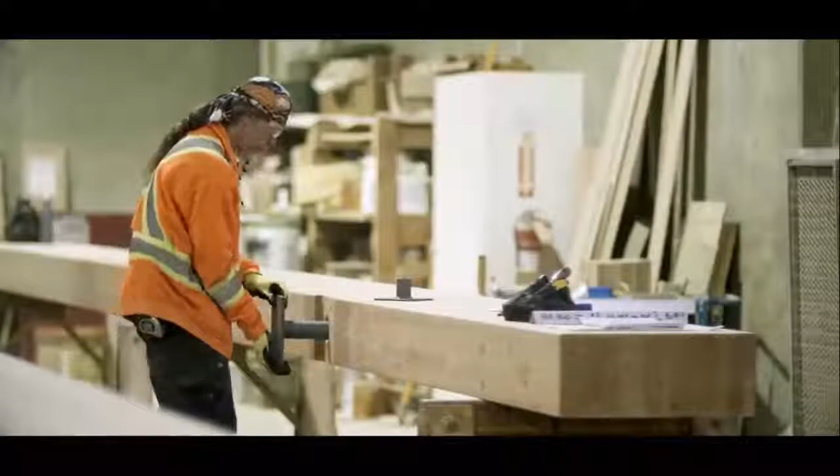They've always been there for us, offering comfort, shelter, even oxygen. Just as we think we've outgrown their reach, we discover a new potential that goes far beyond the treetops. Mass timber construction represents a revolutionary way to grow together, a method of deconstructing what nature provides and reassembling it to be stronger, opening up new possibilities in construction that are sustainable and cost-effective.

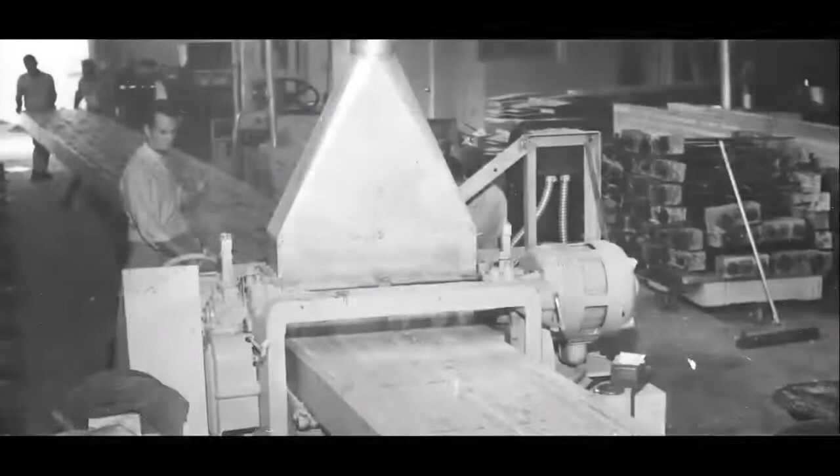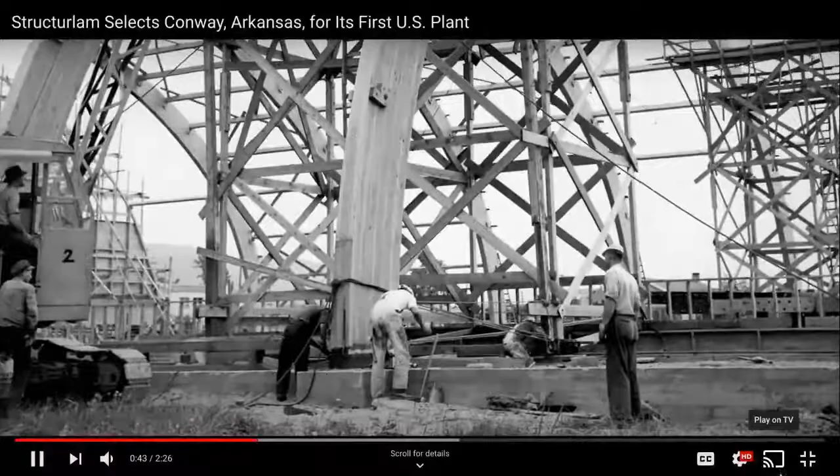For nearly 60 years, Structurlam Mass Timber has been at the forefront of the mass timber revolution. It took root in British Columbia, where we realized early on that the future is not a place we are going, but one we are creating. And we made it our goal to bring about a dramatic transformation in building construction by combining our passion for wood science with timber engineering expertise.

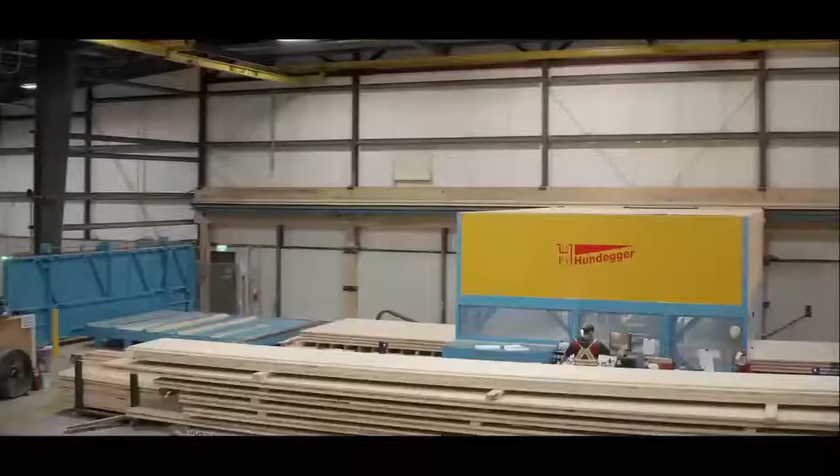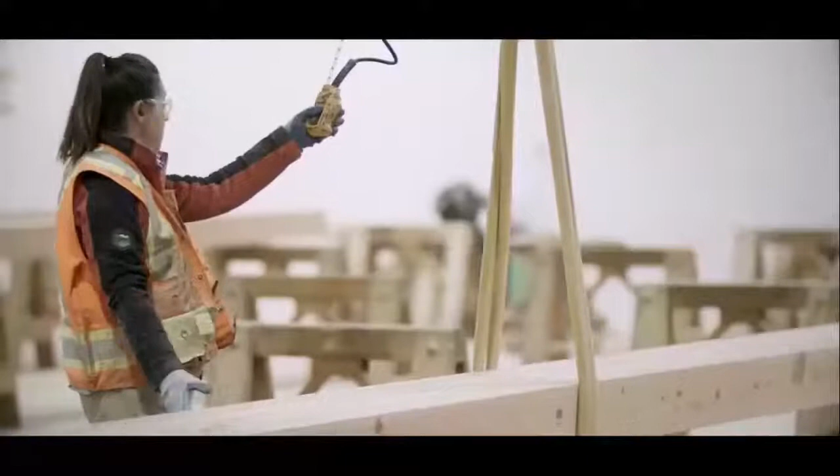Today, our facilities use 3D modeling and sophisticated CNC fabrication equipment to create structural components like our CrossLam CLT panels and GlulamPLUS beams and columns. These products are shaping the future of design and construction, helping to change minds as well as building codes, resulting in tall wood construction up to 12 stories in Canada and 18 stories in the US.

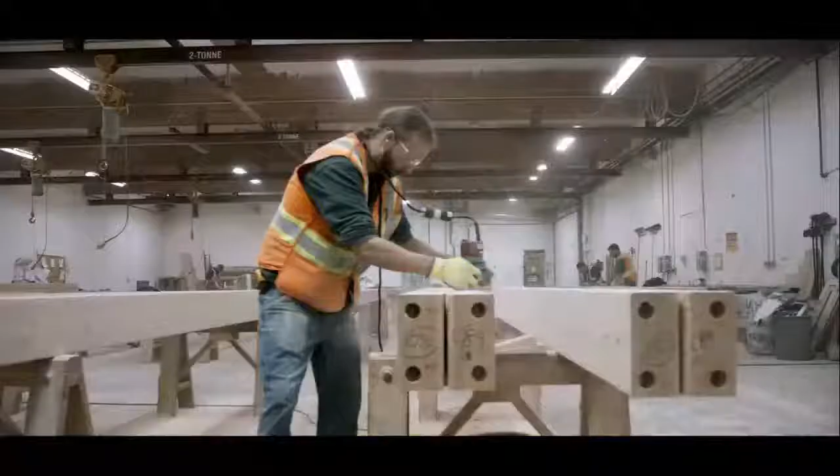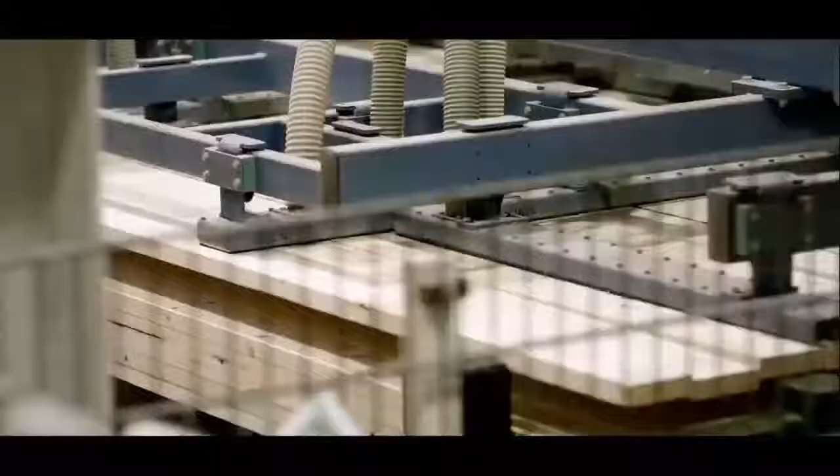Mass timber is appealing to eco-forward building owners and developers for reasons beyond sustainability. It's a proven system that builds without compromise on quality, structural design, or aesthetics, all at competitive costs. Mass timber buildings are roughly 25% faster to construct than concrete, require 90% less construction material delivery traffic, and 75% fewer workers on site.

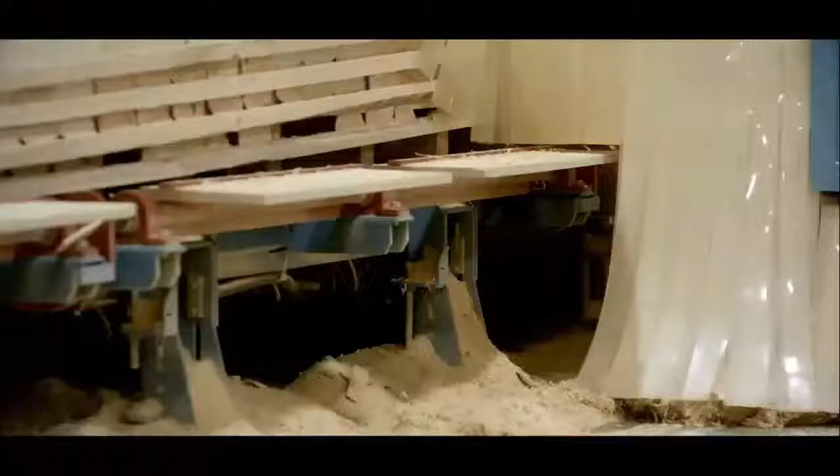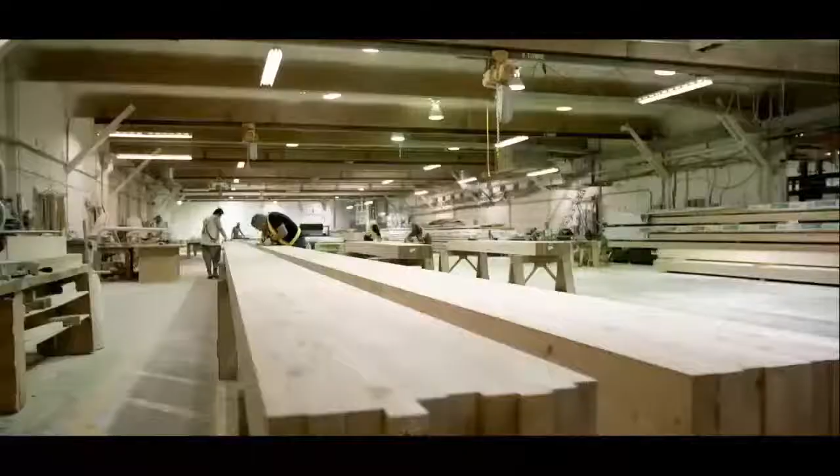Complementing our plant in British Columbia, our new plant in Conway will make mass timber more available across North America, with a combined capacity sufficient to construct 3 200,000 square foot office buildings every month. Engineered and proven, with the power to lock away carbon through the lifespan of the building, mass timber is quickly becoming the platform of choice for architects and builders.

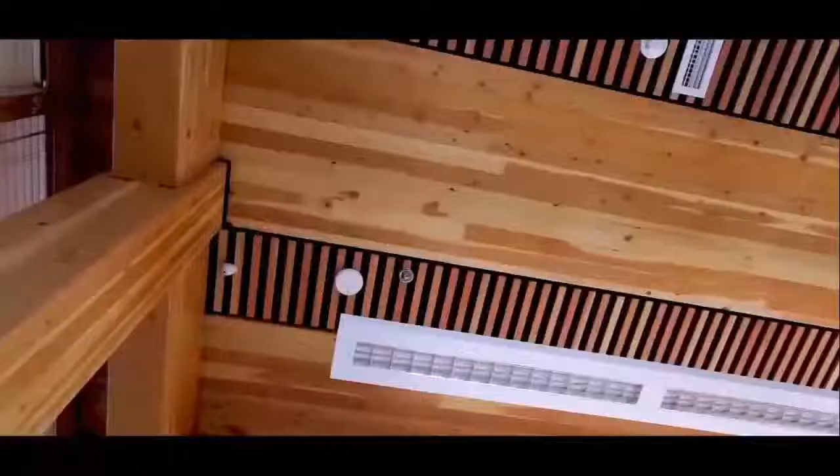At Structurlam, the beauty of our products will take your breath away. Their sustainability will give it back.

All right. I mean, beautiful video, right? Yeah. Thanks for showing that for us. That is a real nice piece of work.

Yeah, for sure. Well, I'm looking forward to talking more about this plant that you have coming up in Arkansas. I know we're going to hit on that kind of near the end of the show with the whole Walmart conversation. So let's give us the overview.

Why right now is this mass timber revolution happening here in North America? Yeah, I really believe it is a revolution. There's some real fundamentals I'll speak to, and then maybe we can go over to some of the other information I shared with you, Dave. But it starts with the fact that North America really has a fantastic building with wood culture.

If you look at the statistics of the consumption of wood per capita in construction, North America by far and away leads the usage of wood in the space of wood in construction.

Secondly, we have a lumber industry where we draw our raw materials from. So Structurlam, we do not make lumber. We buy lumber on the commodity market, and at that point we incorporated it into the manufacture of our mass timber products, which are glulam beams and columns and cross-laminated timber panels.

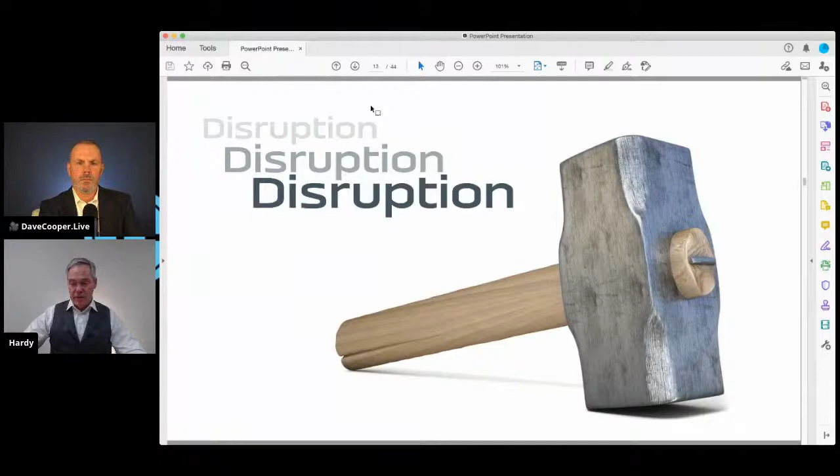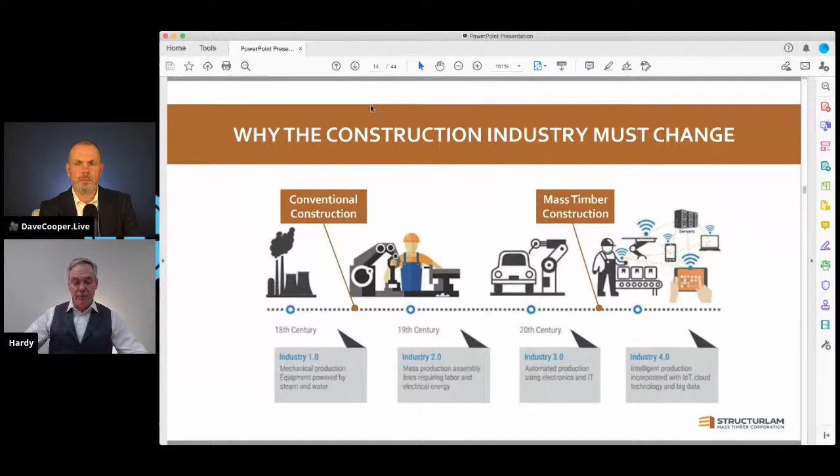Here's some fact, Dave, why we need to have this disruption.

Any off-site construction or prefab trade show you go to today, I'll give a little plug for the Forest Economic Advisors, they're doing a show in December, the IWBC show, you'll see this slide shown all over the place because it really tells the story that we must change.

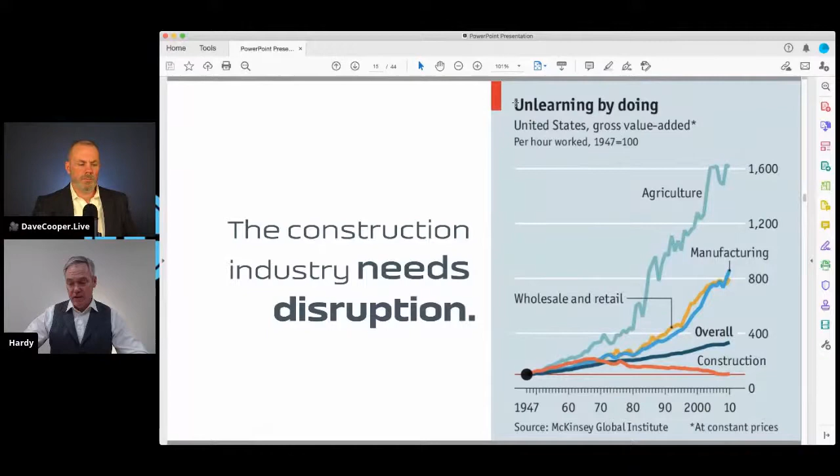Change must happen because we have to continually innovate and drive efficiency throughout the construction process. That's really what mass timber is all about, right? We can build these kit of parts in our factory, everything's CNC to millimeter tolerances, and it delivers on site and goes together as a kit of parts.

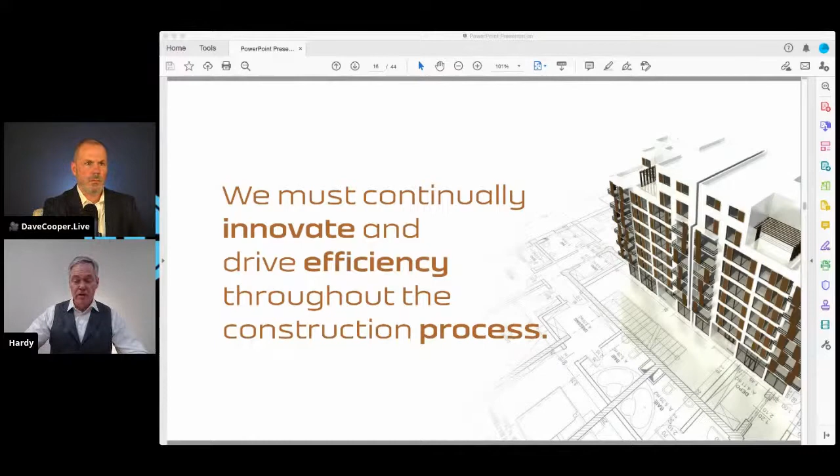If you go to the next slide, the problem is that in the construction industry, nobody wants to be the guinea pig and try to be that first timer, because if you're the first time user, you're also one of the technology enthusiasts, and sometimes you're at the bleeding edge of technology, not necessarily the leading edge.

But I can tell you, if you saw the several hundred projects that Structurlam has done to date, across North America, not just Canada, but all up and down the West Coast, out into the Eastern US, etc., there's many, many people adopting this technology.

So there's this whole crossing the chasm thing I mentioned earlier. Are we going to cross that infamous chasm of death that any new product must go through? I think we're there for all the reasons I've mentioned already this morning.

Yeah, for sure. And when you go back and look at that graph, to see agriculture just took right off, it's like a rocket. And to see construction going in a negative way, that's heartbreaking. Yeah, you're in the industry. Yep, for sure.

All right, one more slide, and we'll look at the product life cycle and where I think we're at. Here's crossing the chasm, from a book written by Geoffrey Moore back in the early 1990s, about technology adoption life cycle. This is a product life cycle curve. You could put I-joists on this curve, OSB, plywood, any building material we know of.

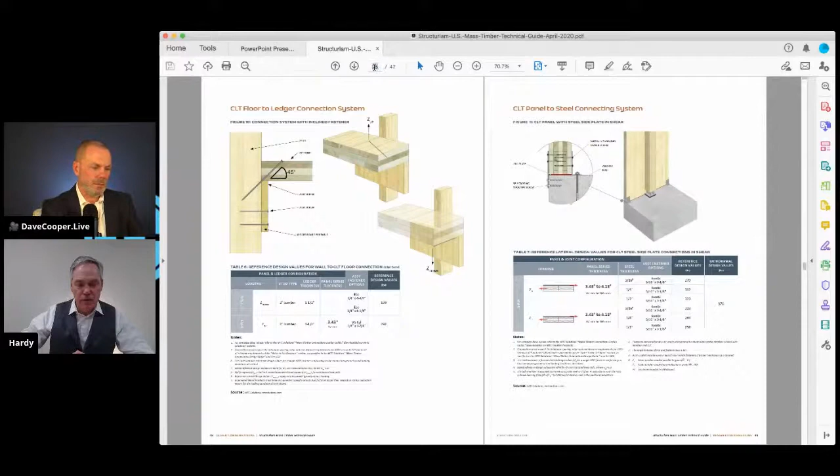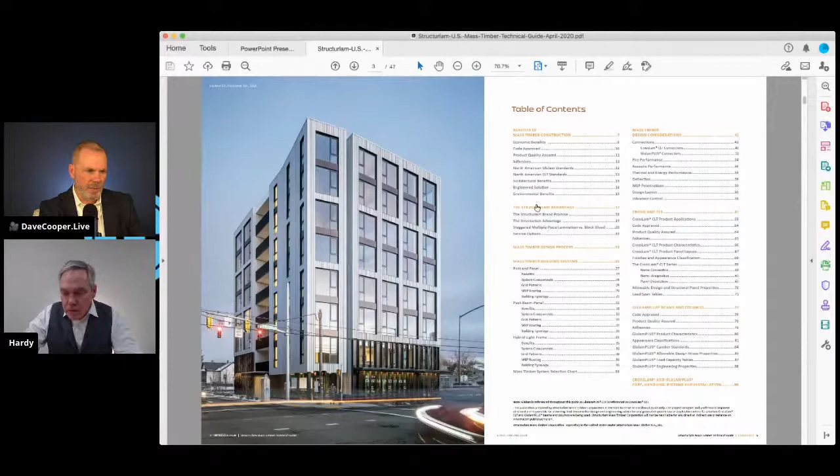While you're getting there, Dave - yeah, page 25 I think. Yep, we're on page - this is CLT floor to ledger connection system. Okay yeah, that's not the one I want. I don't have the copy in front of me. Can you go to the table of contents maybe and just find that for us? Sorry Dave. That's okay, yeah, right there. It should be, if you just scroll down and pull that up. Which one are we looking for? Mass Timber Building Systems. Got it, yeah okay, next page over if you don't mind.

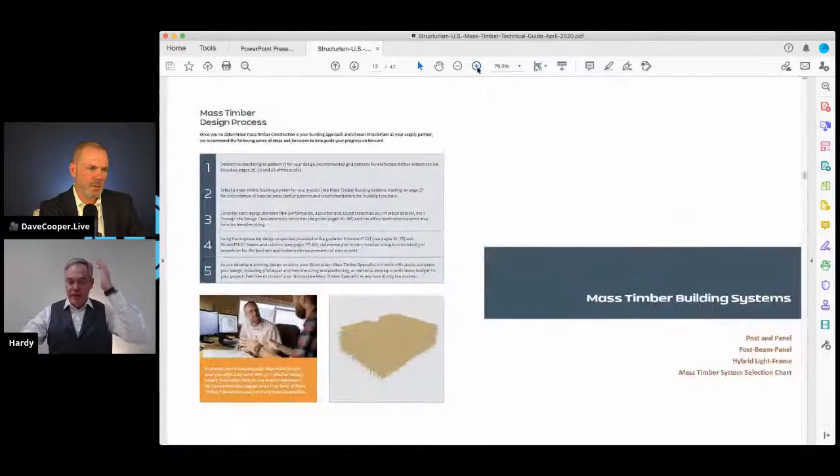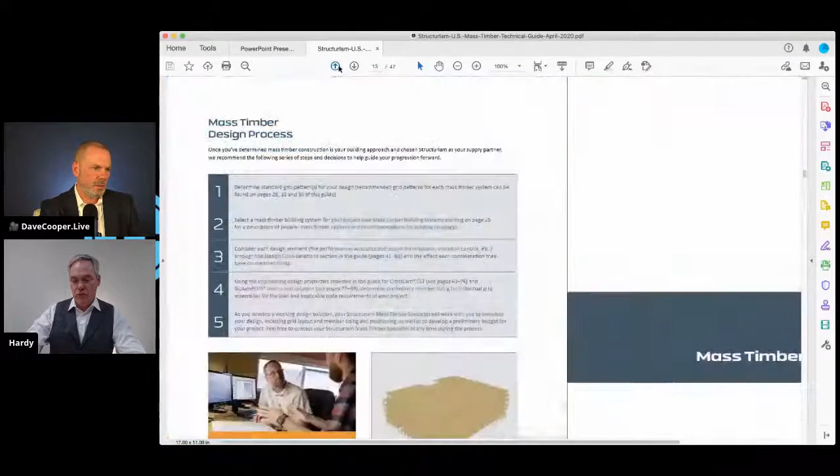Blow it back up so everybody can see it. All right. Yep, if you flip one. Yeah, so - which one you want? This one? Yeah, there's a series of pages. So yeah, if you just reduce that a little bit.

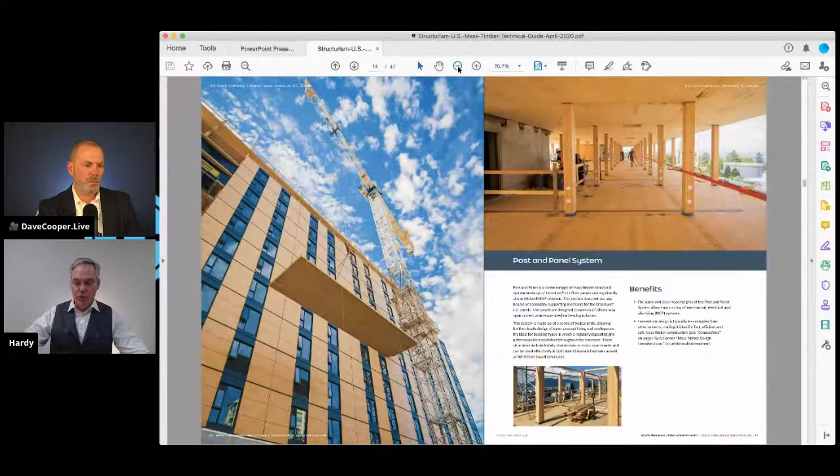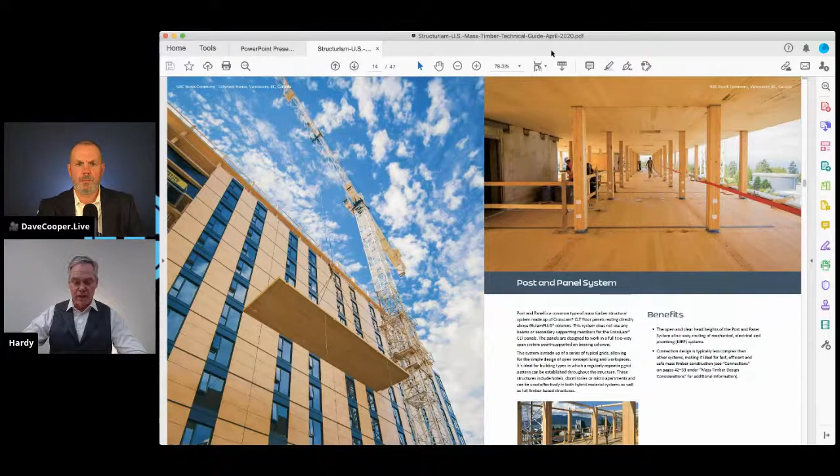We've got a number of different building systems. So the post and panel system is what you see there in the top right photo. Obviously that's the infamous UBC Brock Commons Tall Wood House, which is an 18-story tall wood dormitory at the University of British Columbia. There you've got columns with steel connectors and CLT panels - a very, very fast way to build if you're building a hotel, motel, or dormitory style building. This 18-story building was erected in 57 days, which is unheard of in concrete or steel construction, with super precise accuracy. If you go to the next page please, there's a little bit more schematics of that building typology, post and panel - you can see it going up in that bottom inset photo on the right.

Next page please, Dave. Yeah, can I ask a question on this? Sure. You compare to concrete quite often with the mass timber.

Is the weight load similar to what it is in concrete, and that's why you can do this? Great question, that's almost a softball, Dave. You shouldn't make it so easy, but yeah, the density of mass timber is 1/5 of concrete.

Concrete density is about 150 pounds a cubic foot, and mass timber is between 35 and 40 pounds a cubic foot. So it's considerably lighter, which is also advantageous when you're in a geotechnical area where you've got bad soil conditions or high water table or anything goofy going on with the bearing capacity of the soil. So mass timber really lightens the load.

Now you don't get the full benefit of the 1/5 density, because in many cases, like on that Brock Commons building, the building designers actually had some concrete, 2 inches of concrete on top of the mass timber, just for sound deadening and fire separation.

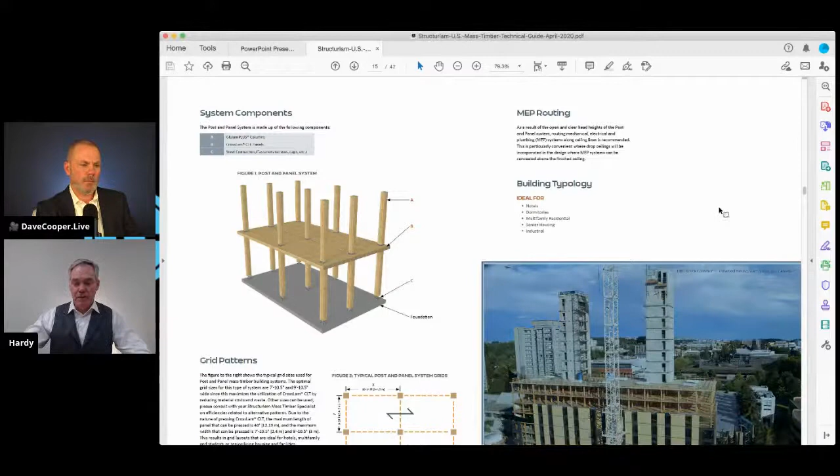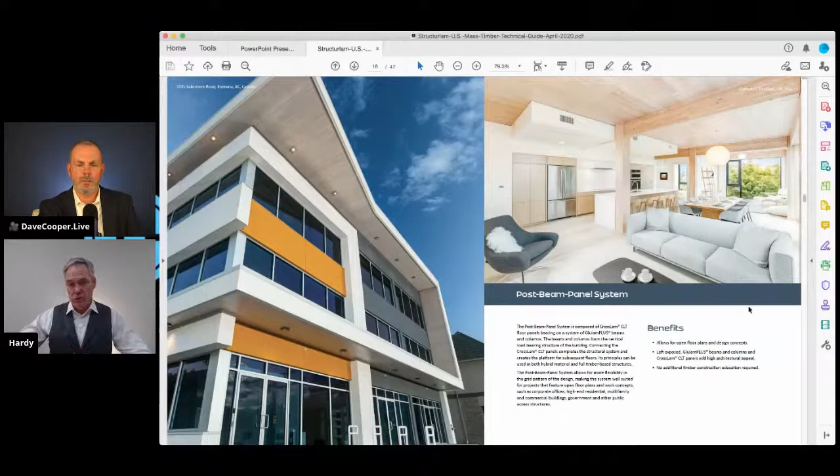I want to show the shot there where Jerry's company - well, this is a post beam and panel system. The difference between the previous one is this has a beam in there, so you can open up the spacing of the column grid, which is also a very important requirement for space planning and in the architecture of the building. We can do anywhere from a 10 to 30 foot grid spacing, which is very suitable for a lot of campus construction, like you would see companies like Google or Microsoft or Walmart use in their building designs.

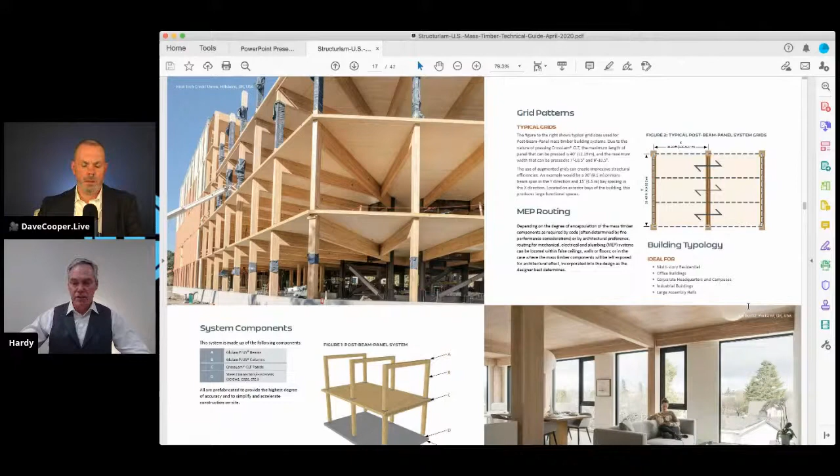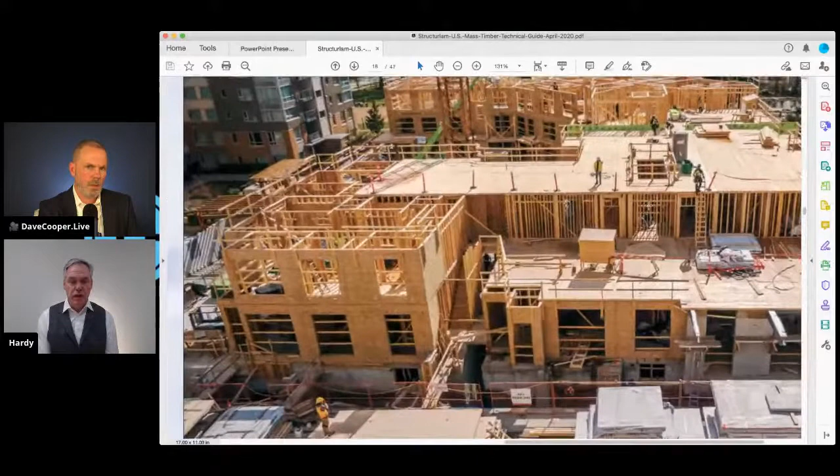That's a significant savings. Yeah, it really is. And here's what we call our hybrid light frame system. There you can see we've got CLT floor plates, and stacked on top of the CLT floor plates are prefabricated light wood frame wall assemblies. And this would come from companies like Entekra. Now I know Jerry's also doing his floor systems prefabricated with wooden I-joists and subfloor panels, but here we've actually got the CLT floor plate. You can see it there, and then the wood frame walls beneath it.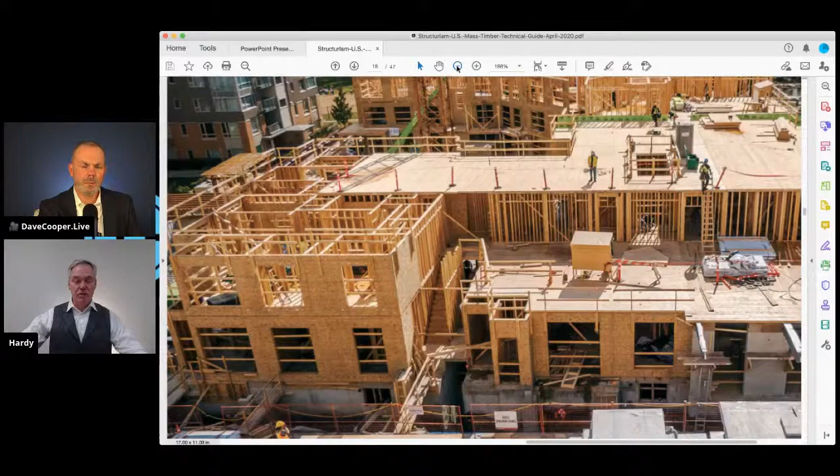Also, we're seeing this actually really have a lot of uptake in the multifamily, 5-6 story multifamily, which is permissible by code to build with light wood frame. The new code changes up to the 18 stories that I mentioned before - that will have to be done in mass timber going forward. So 18 stories is the new building height in 2021, being adopted in the US, and this year in 2020, Canada went up to a 12-story mass timber code approval.

And you can see there that the truck just in front of the building there in the bottom right corner, how the material shows up on site. So that truck load is loaded with the panels in order of sequence of installation on the job site. So when the crane is picking off that truck, it's going right on the site in the location that the installer wants to have it.

Yeah, and how do you work through that? Is it like a number coded, color coded process? So every bundle, every piece is bundled. Every bundle has a tag.

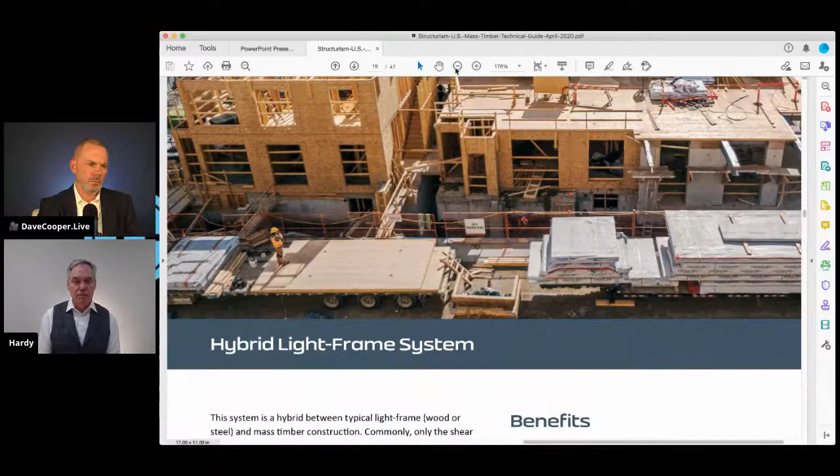It's referenced back to a drawing, a framing plan, so the builder can orientate himself on the site on how to do this installation. It's a very similar practice to what you'd see with roof trusses, wooden I-joists, and wall panelization industries as well.

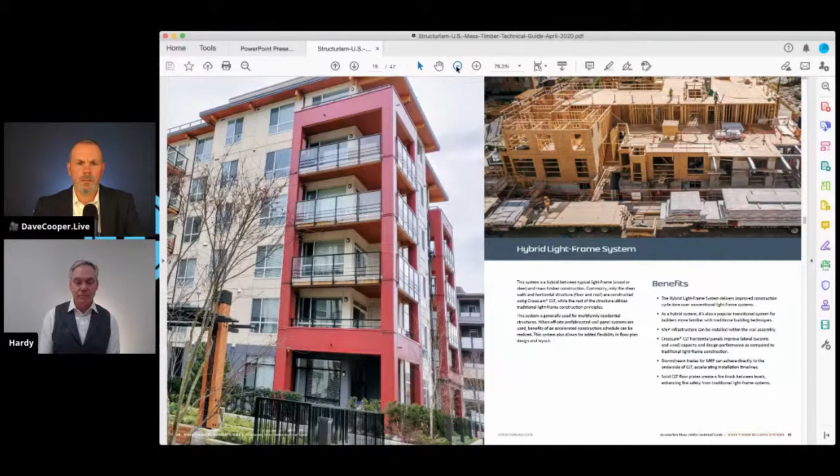With this hybrid approach, are you expecting to see a lot more of it as mass timber becomes more widely used and manufactured here in the United States?

Yeah, I think it's definitely a market segment of interest for us. What we've seen in our 10 years in mass timber is that this usually happens once the product gets a little more mature in a given market space or metro area. It's widely adopted in Vancouver, British Columbia, and we see some of this down the I-5 corridor on the west coast of the U.S. But when we penetrate new markets, like Texas and the Intermountain region, the first place we get traction is with institutional buildings and office buildings. That gets the product known in a given market, and then as people get to know it, they start to experiment with other applications like we're seeing here.

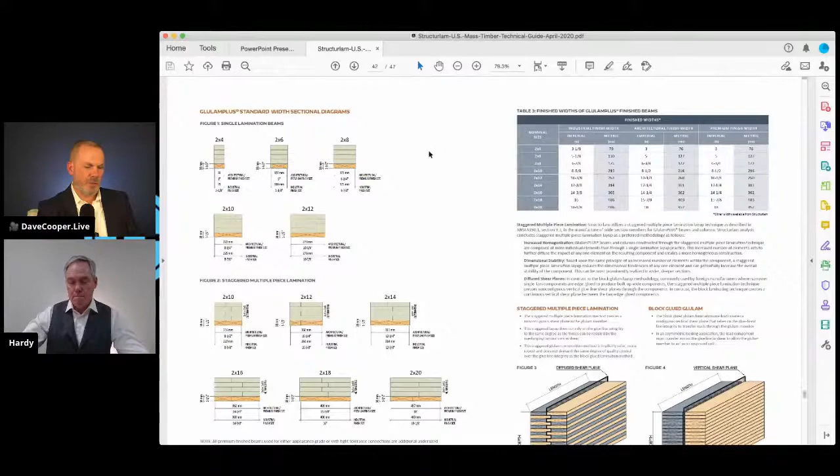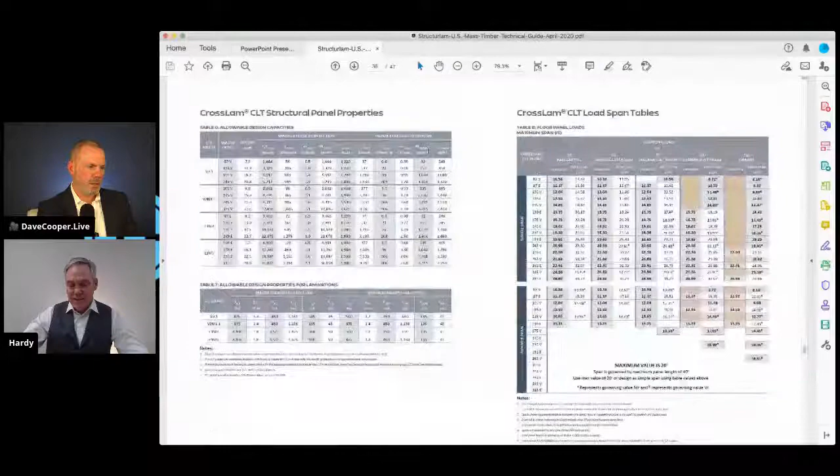With your modeling and 3D precision, do we want to take a look at that real quick? Let's go to the guide, page 52... Sorry Dave, I can't see the page number there. Right, that's 42 right there. No, other way, got to go the other way. By the way, this guide is... keep going Dave, yeah there you go, right there. Back one, and just scroll up a little bit. So this guide, I'm going to give a plug for our new mass timber technical guide.

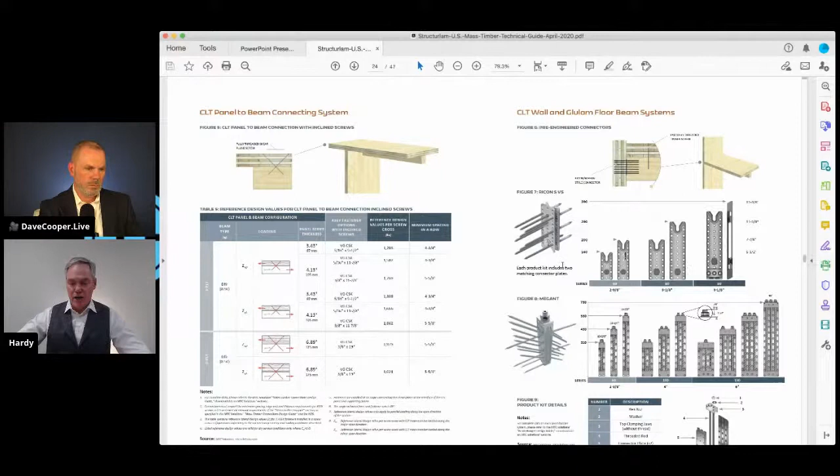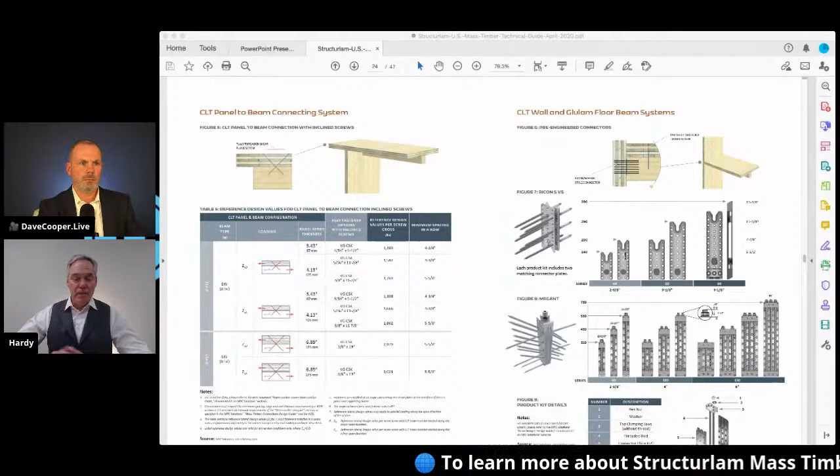Go to structurlam.com, go to resources, and you can download a US version or a Canadian version. This is a 90-page, 92-page document that has everything you need to know about building with mass timber in North America, per North American building codes, manufacturing standards, and based on our years of experience supplying mass timber projects.

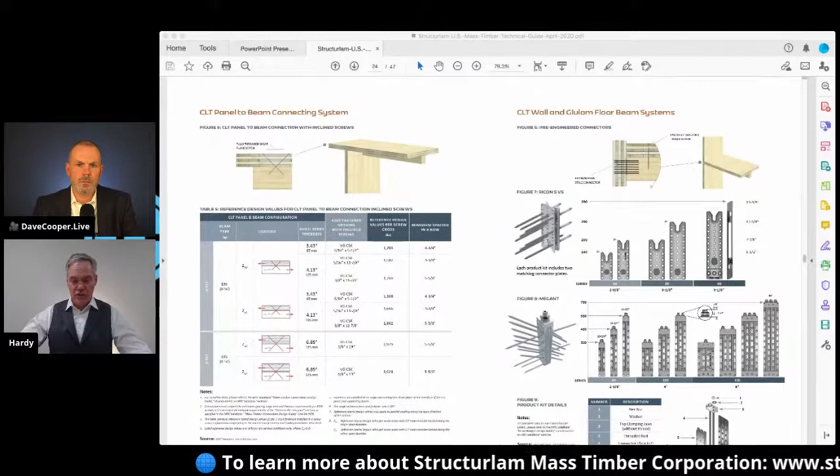Here on this page you can see a variety of connectors, Ricon and Megant connectors. These are European connectors that we find are excellent solutions for light, medium, heavy load applications - whether it's a glulam beam to a glulam column, a glulam purlin to a glulam beam to a glulam column, and also how you'd use long screws to attach the CLT panels to the glulam framework of the building.

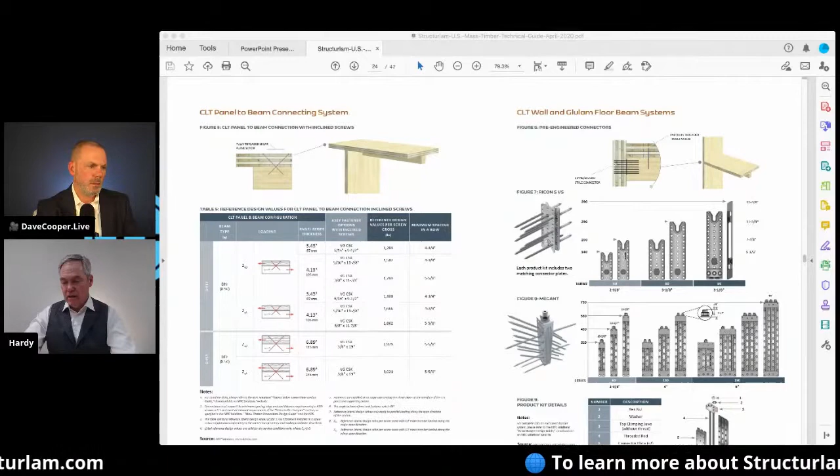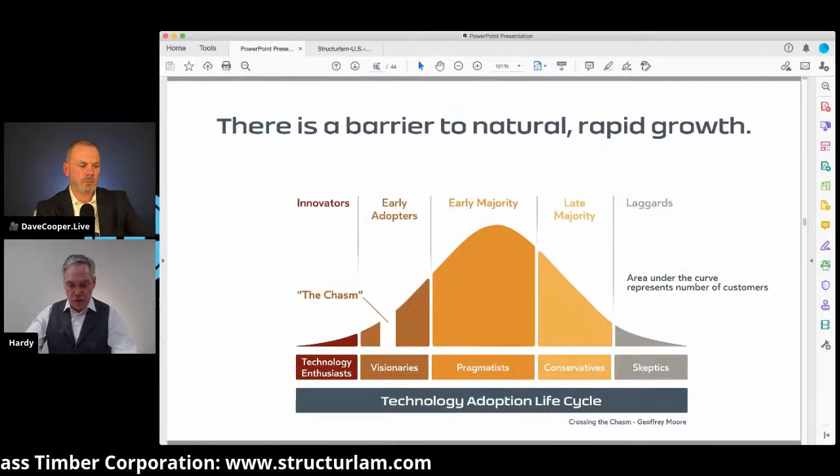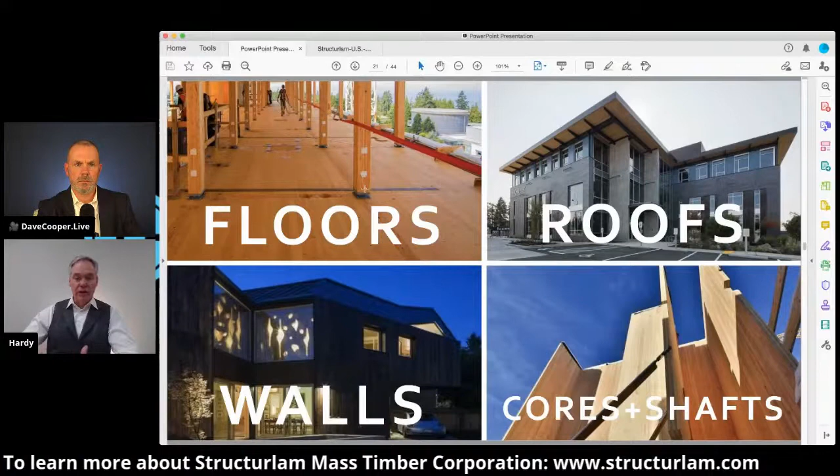Dave, if you don't mind pulling up the other presentation document for me, I can do two birds with one stone there. If you go to slide 21 for me please - here's the applications for mass timber. You've got floors, roofs, walls, cores, and shafts - an elevator core, a stair shaft, etc. So those are all the applications.

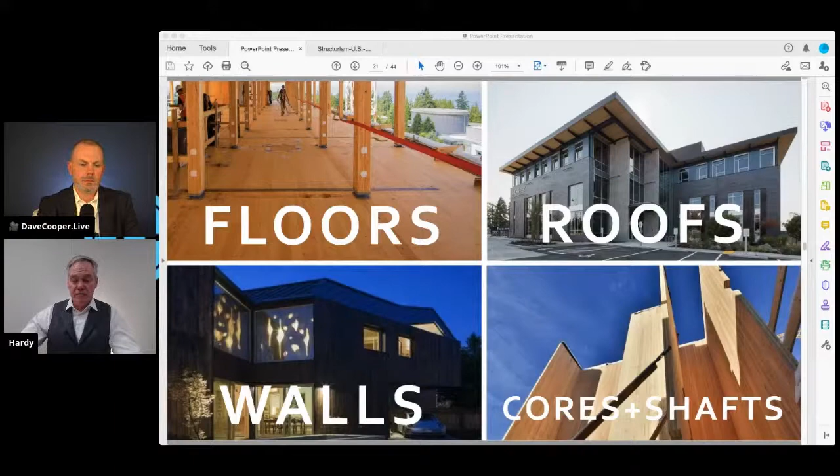Everything needs a glulam framework. Sometimes people use a steel framework, or a glulam-steel combination hybrid with a CLT panel. Next slide please. Kit of parts, rapid installation, better quality, lower cost. Next one please.

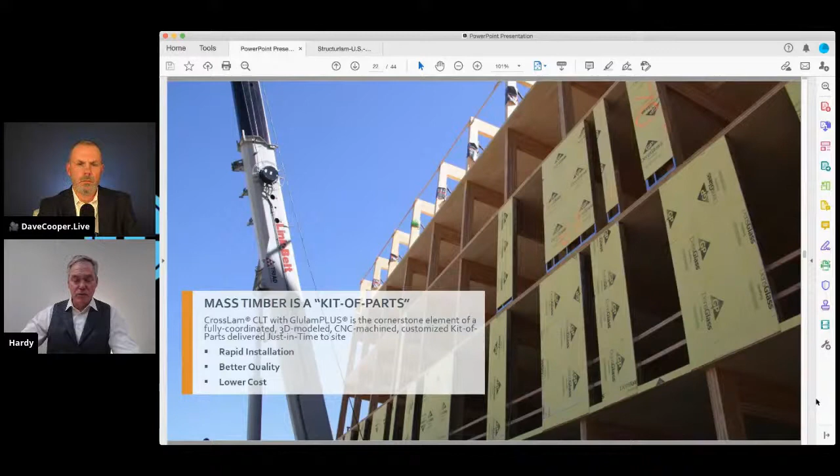We'll come back to this one - here's an example of how those connectors work. On the right sketch diagram you see two Ricon connectors, each rated for a certain amount of load - you can find that out if you download the tech guide from Structurlam. You can see how that's installed - those metal connectors are screwed in with special screws, every hole gets a screw. You can see that little knob at the top, and that intersects into a mating piece on the other side, on the column and on the beam.

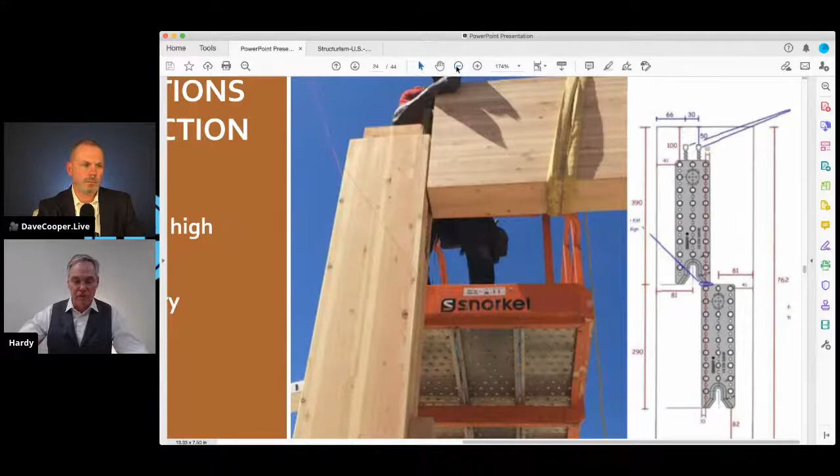You can see what's being dropped into place there. That beam, with a guy standing on a snorkel lift in a sling dropping in that beam - that could be a 4,000-pound glulam beam, depending on depth, width, and length, intersecting into a 3,000-pound column 25 feet in the air. You can just see how that fits perfectly in there.

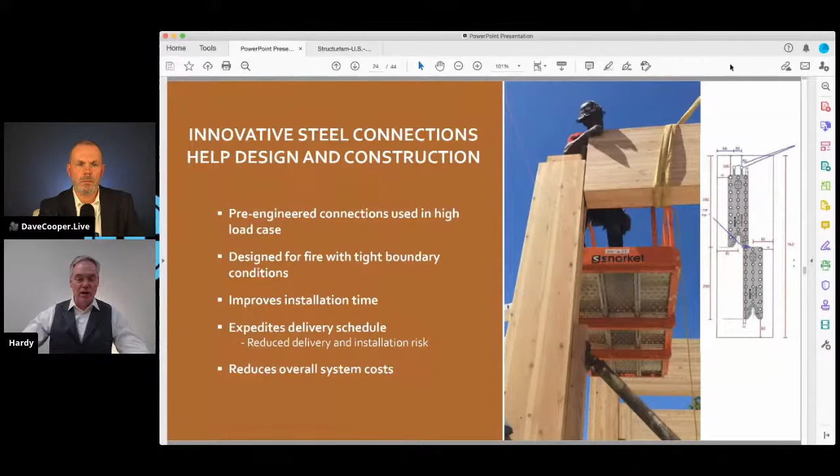So all the loads, all the hangers are pre-engineered connections. They're designed for fire with tight boundary conditions, so the steel is actually protected by the charring that happens when the wood burns. It's very fast installation time, easy for us to shop install so you're not doing this on the job site - we do that in our factory, and it reduces the overall system cost. Now the fire topic - if you go back a slide please, yeah right there, that's what happens when mass timber burns.

It's like trying to light a campfire with a log. Very hard to do - it usually will char and smolder and smoke for a long time. It's not kindling, these are big, massive pieces. But you can see that char rate actually creates an insulative layer around the meat of the wood, and what that does is it keeps the strength properties of that wood intact, allowing it to support a certain amount of load while the building is being evacuated during a fire event. When designed correctly, wood is a very suitable building material that performs very predictably.

Again, all this information is in that technical guide I talked about earlier. We'll have the links up for people to find all this, but you can find all of this on your website - there's so much there.

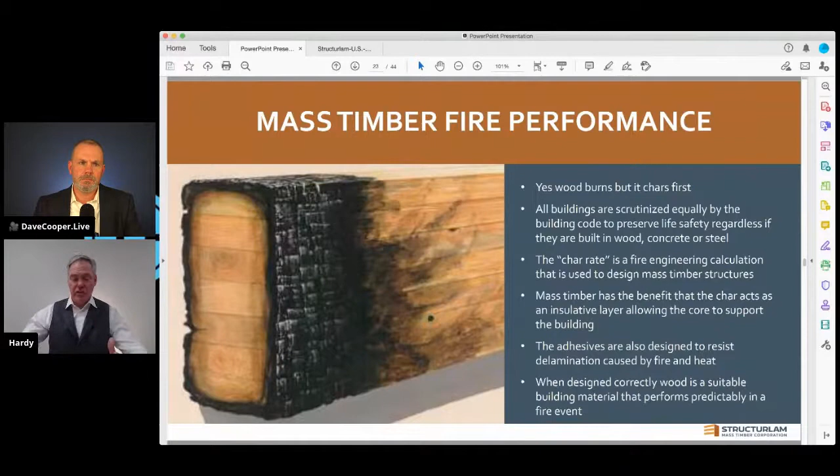Now, what about the acoustics of the buildings? Acoustics is another engineering discipline, acoustic engineering. Again, if you go look in the guide, page 56, you'll learn all about acoustics. There's been a lot of work done by academia, colleges, universities, research bodies, all about acoustics. It basically takes the philosophy where you have to build up an acoustic system - it's not just the panel. You have to use various different materials to get your IIC or STC sound ratings for whatever building you're trying to build. We in fact have one developer in the Vancouver market who has done all kinds of acoustic research, and what he's branded his multifamily product as the quiet home, using mass timber, using CLT from Structurlam, and has developed a certain assembly to get these high performance acoustic ratings.

Yeah, perfect. All right. So listen, we're down to the hour here. So why don't we wrap this up with Walmart invests in Structurlam - can you give us the overview on that? I have this teed up already here for you as well. You bet, oh thank you.

So it's all about Structurlam and Walmart, a made in Arkansas story. Walmart wanted to build a campus - 2.5 million square feet of office space, building it in their home city of Bentonville, Arkansas, up in northwest Arkansas. They are very sustainably minded, with very strong corporate values around sustainability. When they decided to build this new campus for the 15,000 Walmart associates that will come to work every day, they really wanted to make it a beautiful piece of architecture - biophilic design, sustainability, mass timber. They decided on mass timber very early and went ahead with that. So Structurlam was involved in an RFP process.

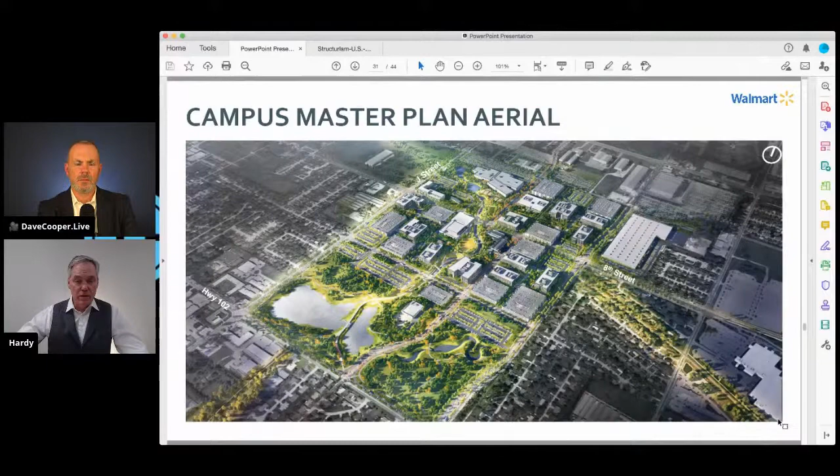And there's the overview of the campus. This is still a rendering, but it's a 350-acre site right near the center part of Bentonville. There will be 11 or 12 office buildings, parking, green spaces, etc. It's going to be a fantastic site for people doing business with Walmart or working at Walmart. You can see what it's going to start to look like in the campus - this is still evolving and changing, but each one of those buildings are office buildings. They'll be anywhere from 4 to 5 stories high, with a Glulam mass timber grid and CLT panels, making just a gorgeous office building. The next slide shows another really good look at the greenway trails and bike and pedestrian paths.

So we're just super excited to be working with Walmart on this. They were so enthusiastic about working with Structurlam that they also made an investment as a minority shareholder in the company, really helping us get our foothold in Arkansas, which will also open up a whole new market for Structurlam right there in central Arkansas. The location where we're building our plant is in Conway, Arkansas, just outside of Little Rock.

Sure, all right, love it. Love it.

Do you have more slides on here, or is that good? I think we're good. Yeah, for sure.

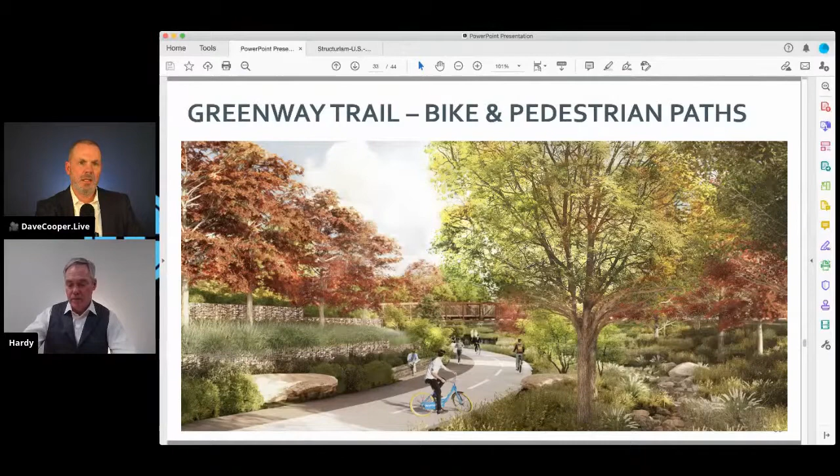The other thing I'll say is companies like Walmart, Google, Microsoft, they all have very ambitious sustainability values. They take climate change very seriously and think they can move the needle, and they can. They're very large companies, and some of them even want to be carbon negative going forward. They're very ambitious, and they know that our built environment is the largest contributor to greenhouse gas emissions - what it takes to build a building, the building materials, and what it takes to operate a building. That's one of the biggest challenges across the globe.

Yeah, I think it's great, and it's wonderful to hear how much respect you have. We talked offline about Walmart and their sustainability programs and really trying to do things better.